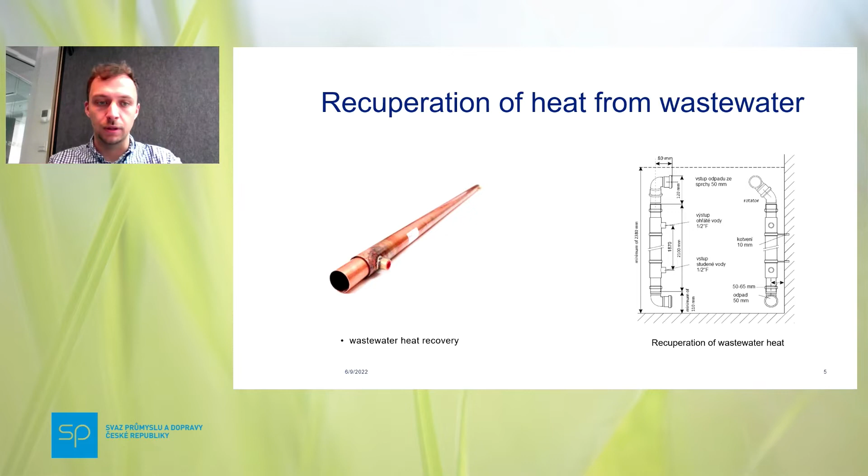But that is a different subject of presentation. If you can exchange the energy of water, you can also exchange the energy of the air inside your flat.

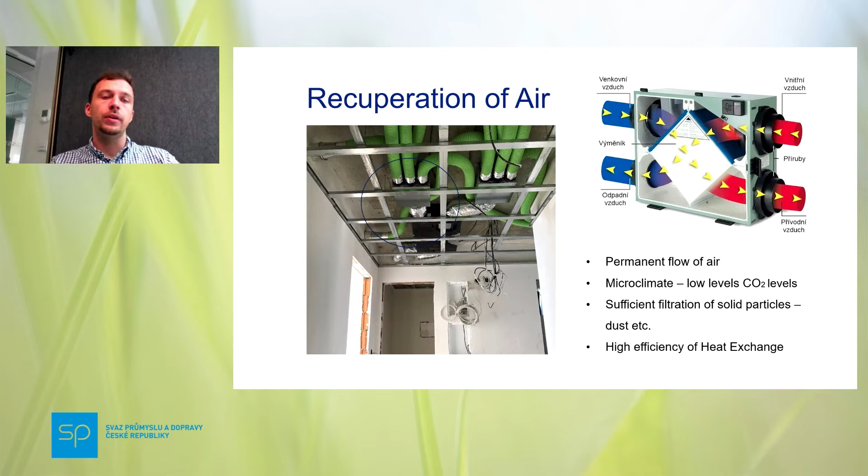Here the heated air gives the energy to the outside air and flows out. So you have sufficient circulation of your inner air in the building, and sufficient filtration of solid particles. You have permanent flow of air, meaning lower CO2 levels, so you don't have to open the windows that often. Also, the efficiency of heat exchange is very high. So these are the solutions that basically renew energy and are very efficient in exchanging the energy in your building.

But how can you produce energy inside of the building without any outside system, meaning burning gas or anything unrenewable? Basically, solar panels that can preheat water for heating of the inner rooms and all the flats.

So basically, the logic of the system is that cold water is pumped up to the roof, where it circulates through all those solar panels, is preheated to, let's say, 40 to 50 degrees Celsius, and then it is put down again where the gas burner is, and is heated to a temperature that is reachable, which is what you need as a consumer.

So basically, from the energy certificate that we have created for this actual project in 2021, it has been put into the occupancy permit. It's called Čertův Vršek, and the installation of the whole energy efficiency system covers one third of the whole energy demand of the whole building. So that's a piece of cake that can help all of the projects through the whole project.

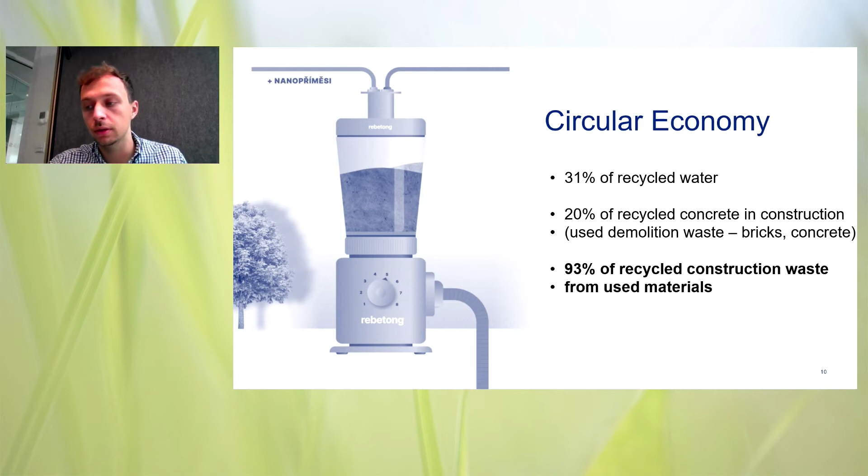Also, all of the material that is not used during the construction process is being recycled. We have different containers for at least 10 different materials, such as plastic, glass, insulation, plasterboard, wood, steel, and I could count up to 10.

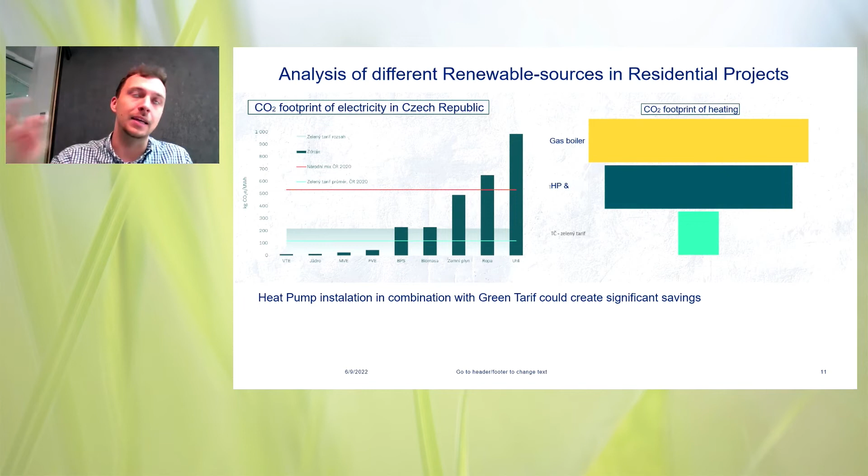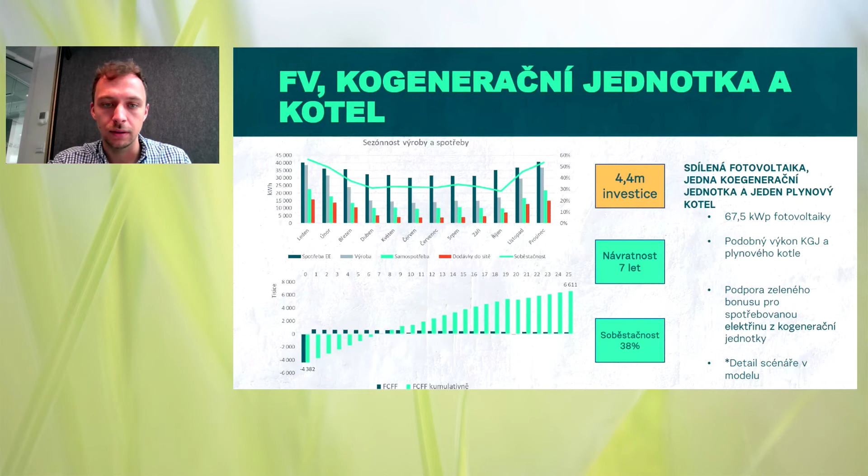I don't want to mention these since time is running out, but I want to jump into the CO2 footprint as far as I can. We have a primary energy demand which we're trying to follow, and to accomplish a 2030 reduction of 50% in CO2 footprint, we've developed this table that forecasts CO2 emissions per year of all our projects, because the energy dependency is closely connected to primary energy demand and all the sources. I don't want to go into detail here, anybody interested can contact me and we can discuss this later, but I want to mention that we are already doing something to follow EU legislation.

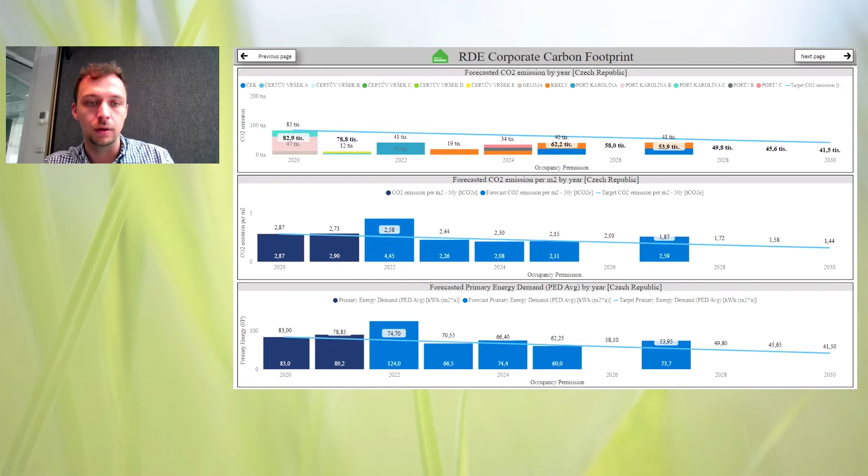What we also did in Port Karolína, is that we offered green energy and electricity for all of our clients. We pre-provided it, and by now, like 2 or 3 years ago, 66% of all flat owners remain on the green tariff that we offered them. This one was done with this provider; in different projects, we use different providers.

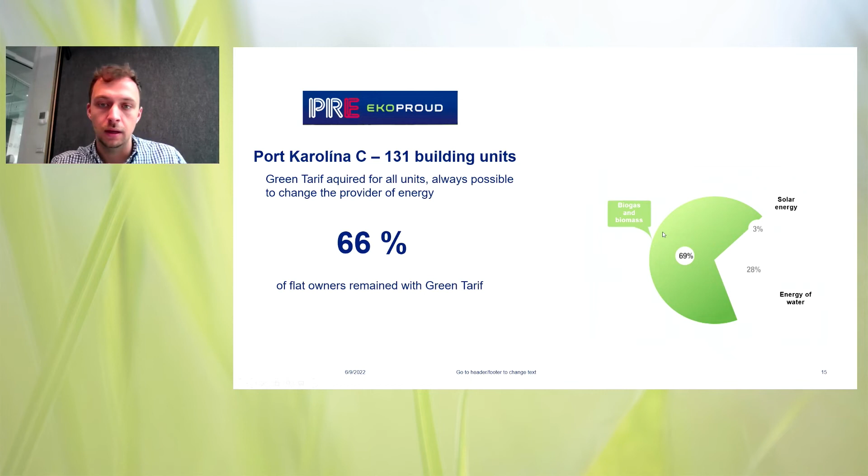We also support electromobility. That means that in most of our new projects, we have fast chargers, and also in the basement, we have the EV charger that you can buy as a new owner with the flat.

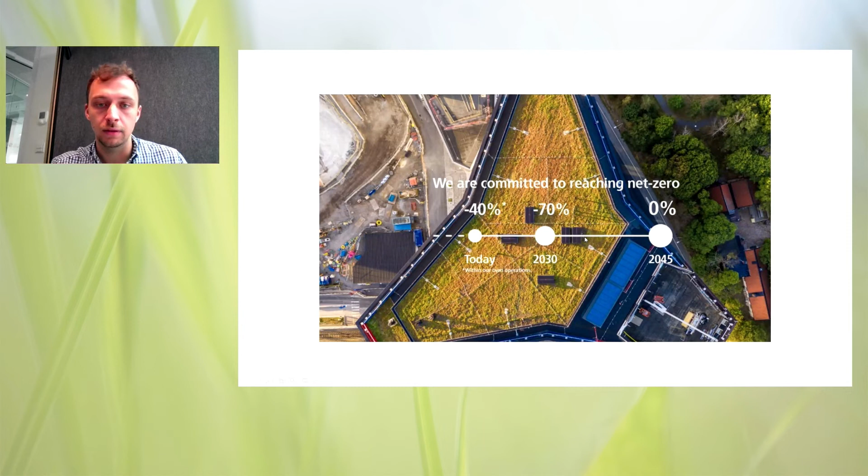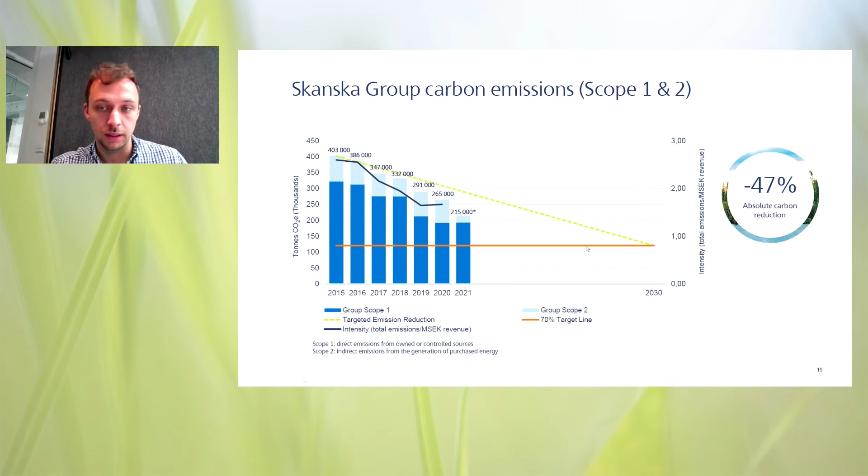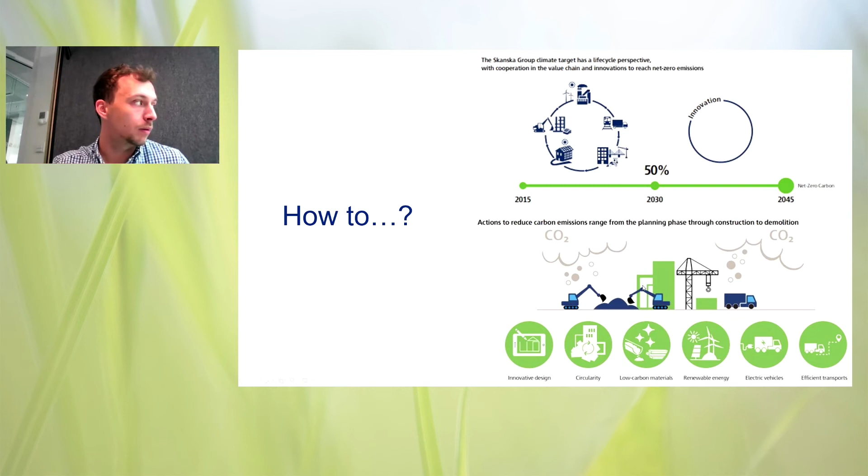So it's really nicely going, but that's scope 1 and 2, meaning the direct emissions that we emit. It's not scope 3, but that's the CO2 of how to accomplish it. Basically, it's circularity, low carbon materials such as low carbon concrete, renewable sources, vehicles that are

powered by electricity, and so on. And in scope 3, it's basically all about the concept of design. As early as you can design a building that is going to save carbon emissions, the better, because in the construction process it is hard to accomplish that once everything is already designed.

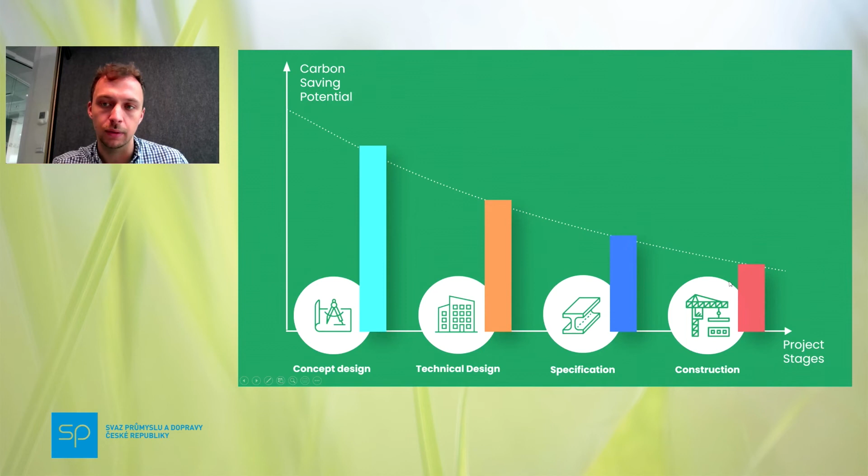So this is how the carbon model should go. The early stage of design is basically what matters, and a small detail in the end: we are already planning to build the first wooden structure that is going to be 6 stories high, and that already saves around 60 to 70% of CO2 emissions in embodied carbon.

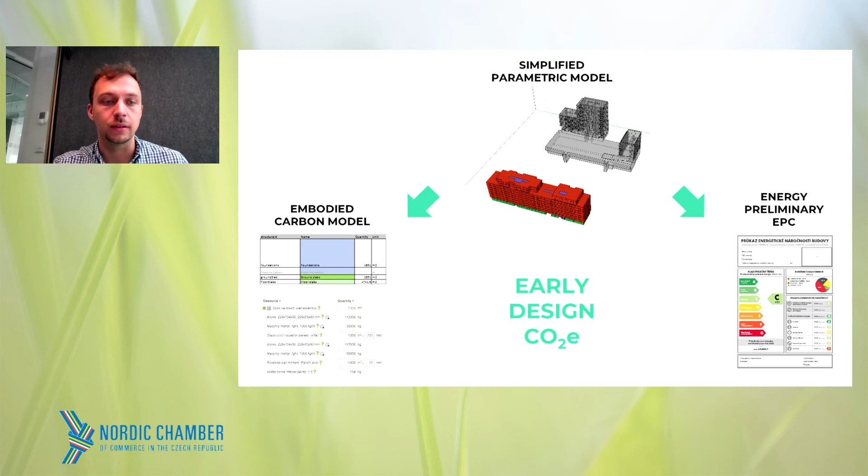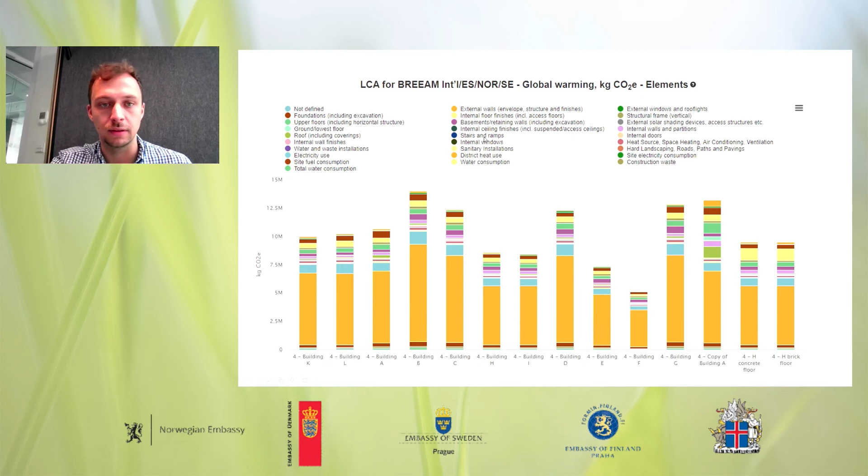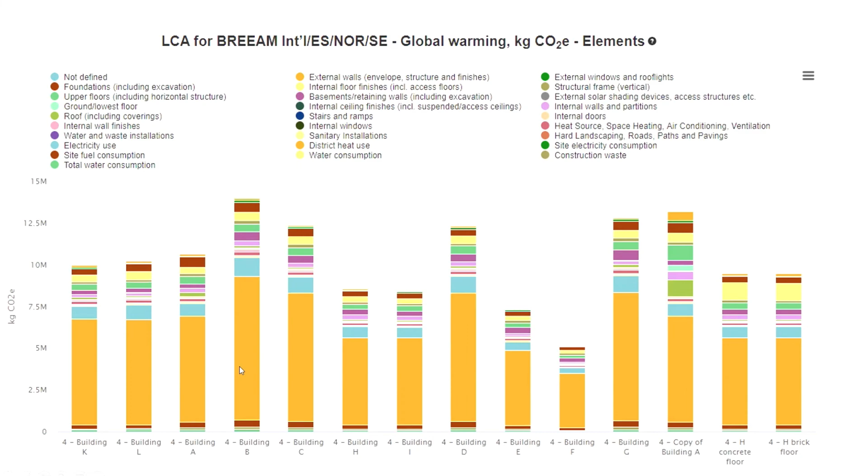That means that when you're starting with materials and district heat use, over the 50 years of use of the building, the energy needed is the biggest factor. So if you want to lower the emissions of a building throughout this whole life cycle, basically the energy that is powered into the building has the biggest CO2 footprint, not so much the materials.

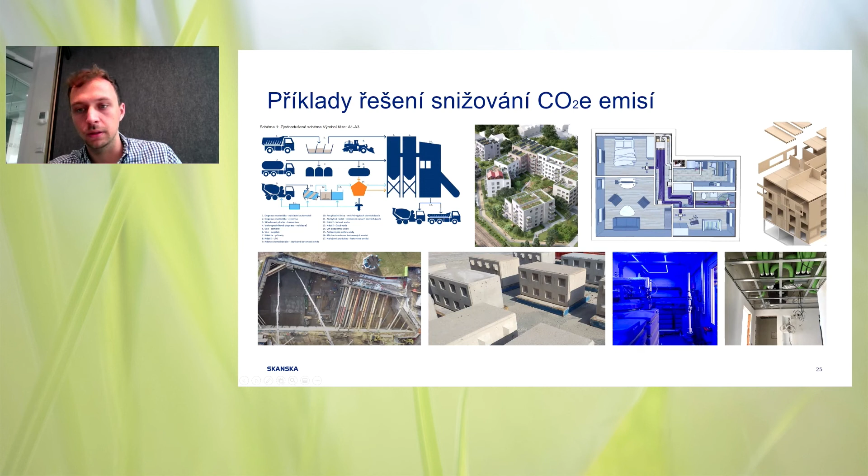This is only some of the CO2 solutions that we use, as I described: low emission concrete, renewable sources, recuperation of air, wooden structure, also grey water system.

And that is the final slide of my presentation. Hopefully you got the message, and thank you.